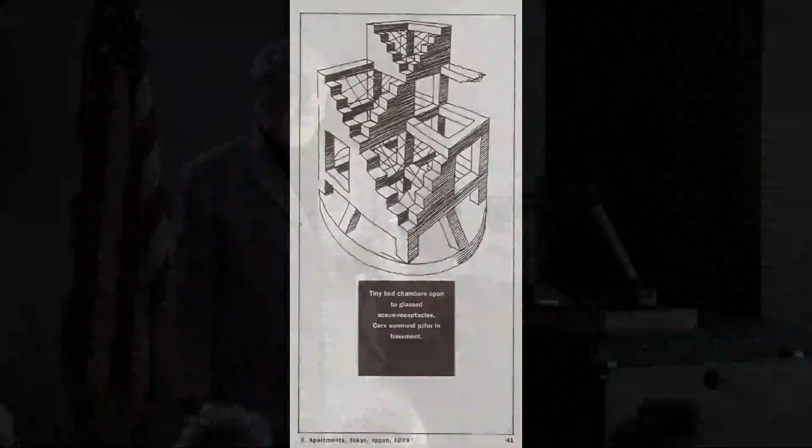And this, which is 3 apartments in Japan, in Tokyo, in one of the first drawings, belongs to this kind of imaginary beings, almost like monsters, but the geometrical aspects are explored through it.

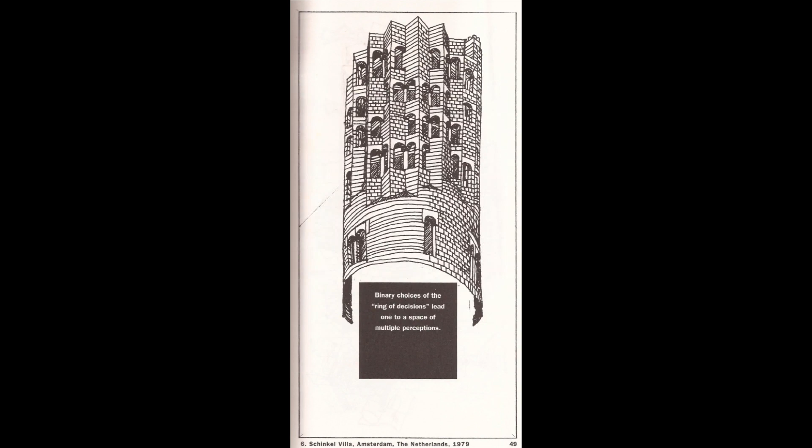This is also one of the first drawings of a villa. I just would like to show you that one has to develop this ability for what you think - as you used to say, and now I'm also prone to say - it's in my head, I just have to draw. So this transfer from your head to the drawing is very important, and you just have to be courageous and believe that you can do it, because everybody can.

It's not something which you have to be afraid of. This is a special project.

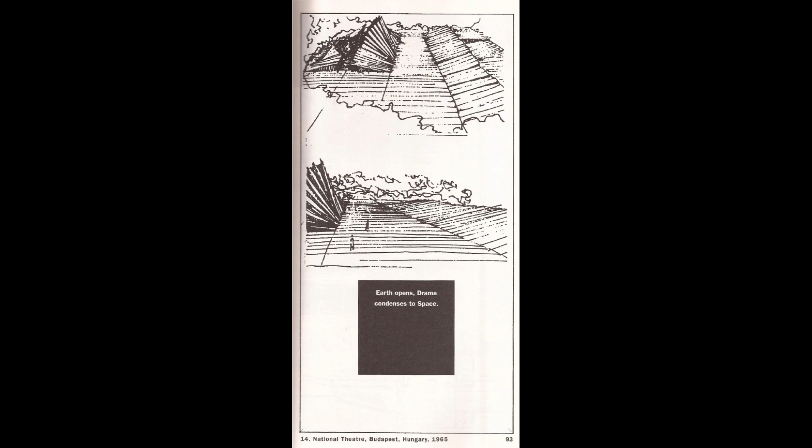This is one of the first of the 3 Hungarian theaters, national theaters, which I designed a very long time ago. Through it I became somewhat known to the grown-up architecture community, because I designed it while I was still in architecture school, as a competition entry, a national, international competition.

So it was really something which was another encouragement for you, that you dare to do it, because that's how you learn and that's how you progress.

I like these little, I'd say limping prose poems. Earth opens, drama condenses to space. Somehow it really defines a theater, at least for me.

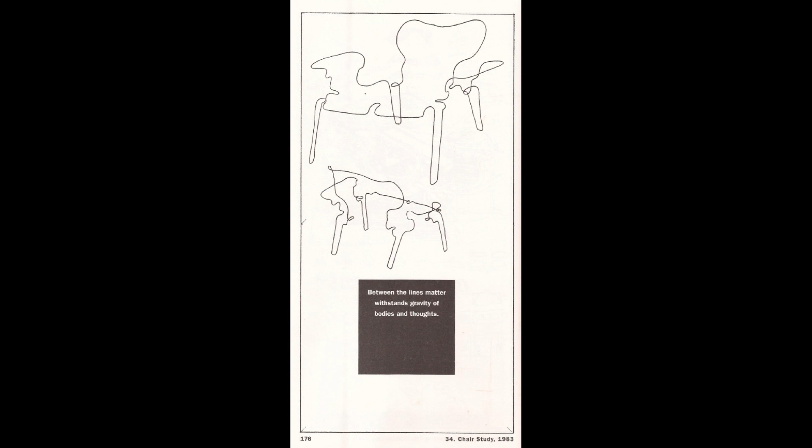Now, this is obviously a chair, or two views of a chair. And it has also, that's very funny, a definition that between the lines, matter withstands gravity of bodies and thoughts. This could even be a kind of program in architectural design, because that's what we are doing - we are drawing, and the lines represent the material.

If you think about it, I was very surprised how your mind regulates what you believe or what you see. Don't you see clearly that the chair material where that dot is, is solid, and this is the air? I sort of started to see it after I programmed my mind this way. So I think programming your mind is a very important element in design.

This is one of my favorites - it's the Peggy Guggenheim Museum in Venice. I think this is the most complicated drawing which I ever drew directly on paper.

There's too little time to explain, but I also studied the Venetian Palazzo as a building type, and all of the tripartite elements which are part of the Venetian Palazzo are here in a very complex way, in several directions. I'm sorry, but we could not get into the individual projects because we'd be here till midnight.

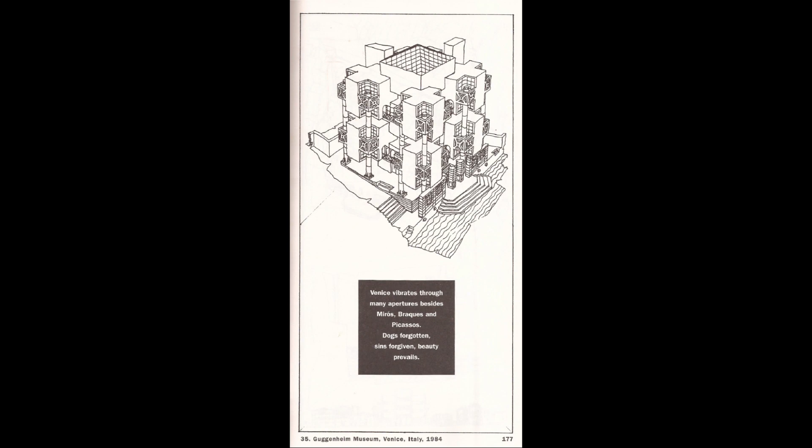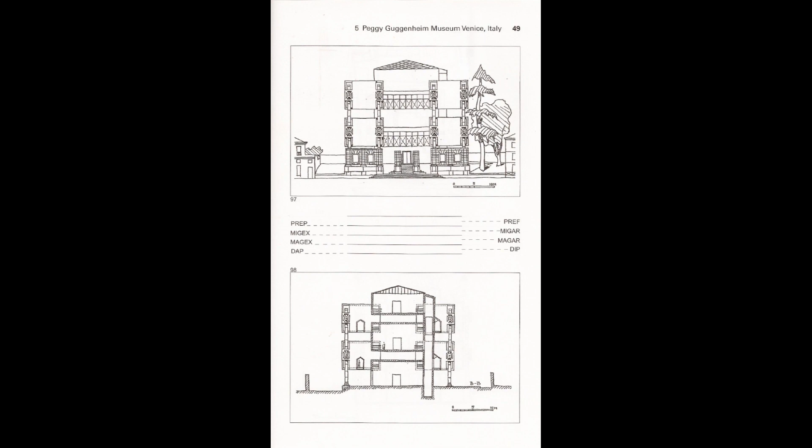This is, again, the same building, and in the middle you can see the location, the position of these abbreviated notions - data processing, data interpretation, and so on. The drawings are numbered, so when it comes to the final summary, you can just map the drawings in the appropriate place. This was another building, a house for a virtuoso, also in Venice.

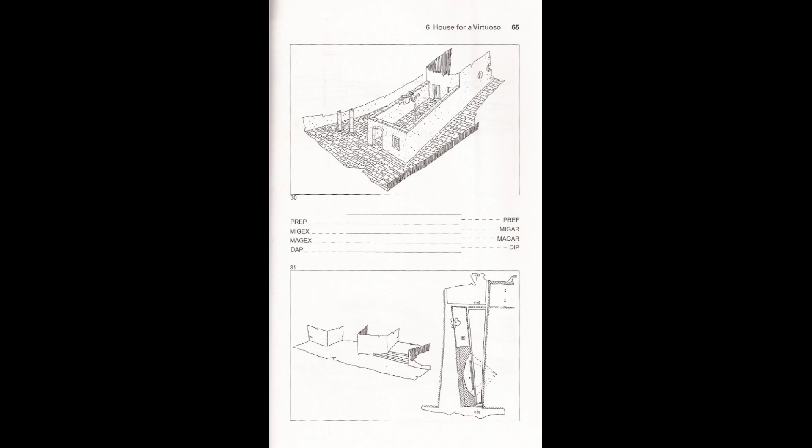And this was the third project, the so-called Venice Gate competition, which was really just a bus station with some office building, but positioning it on the Grand Canal made it a very interesting exploration. This drawing, I enlarged it, because they are somewhat in the manner of these imaginary beings - they look like more than a building only.

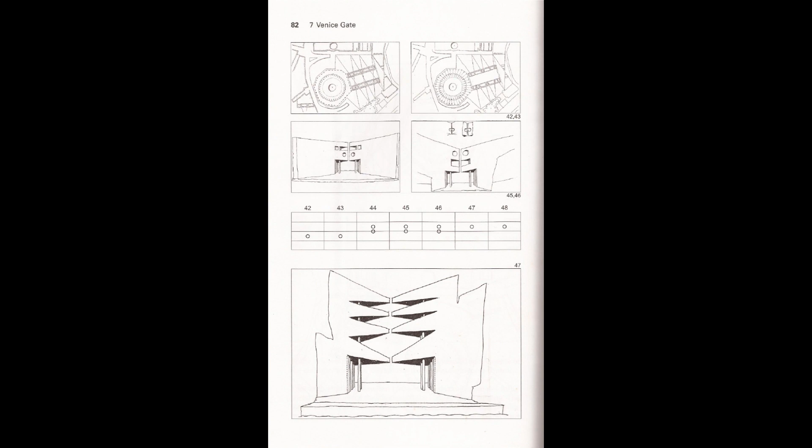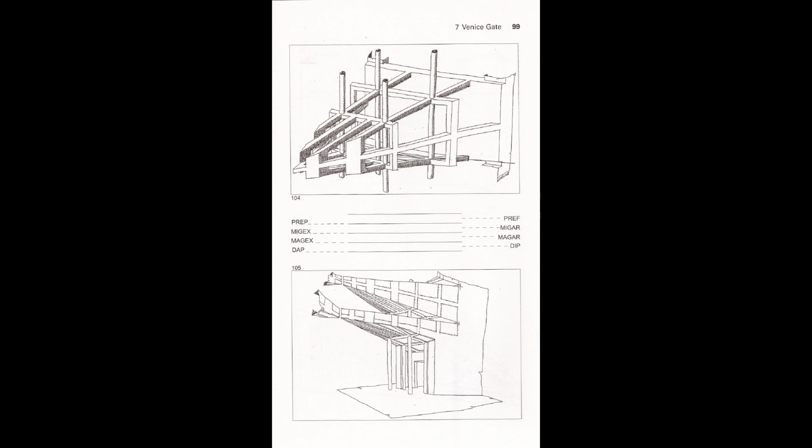With my phone call to Alvaro Siza, he gained a 2-year internship with him as a model maker. So I'm very proud that this model helped him to work with one of the great architects of our times.

Here is that so-called partitura of the design process, where, of course, the upper numbering is the drawings. As you can see, not even all the drawings are included, however the major drawings are all there - and even this short competition has 150 or so drawings.

So the numbers are not just for the sake of numbers, but when you are really questioning in the design process and not making statements, they automatically come up as the next and the next level. So you almost cannot stop.

I made an inventory, and I've lived around 20-some thousand days. I have 10,000 drawings, so every second day I produce a drawing. So that's maybe how you can gauge that it's not only the drawing you live for, but it's definitely one of the major pleasures which you get from life when you can explore and invent, in many cases, some things which haven't been.

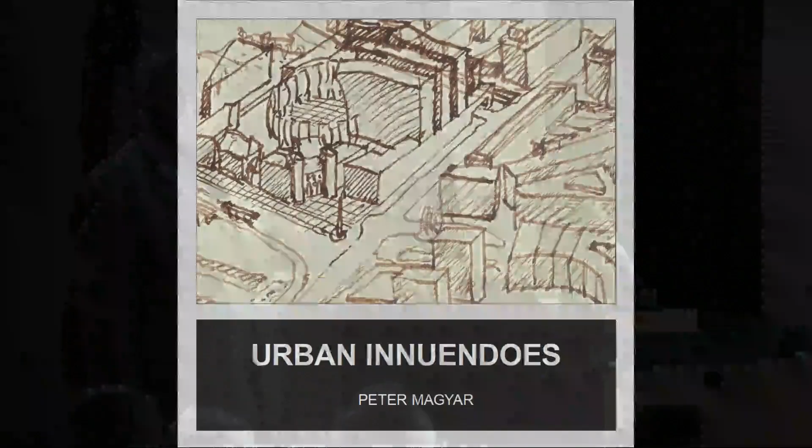This is the third project, the Urban Innuendoes, and I just blew it up because one of the 3 or 4 co-authors who had written essays in the book emphasized this: that the journal, this book, or the drawings actually, are a journal of emotion, because they show how you draw, how fast you draw, where you hesitate, and so on.

And of course, my favorite tool, as most of you know, is this - my fountain pen. However, I have some problems with it now because I'm waiting for the kind of divorce settlement, because now I started to draw on the tablets with a very blunt tool, the stylus. I'll show some drawings from that as well.

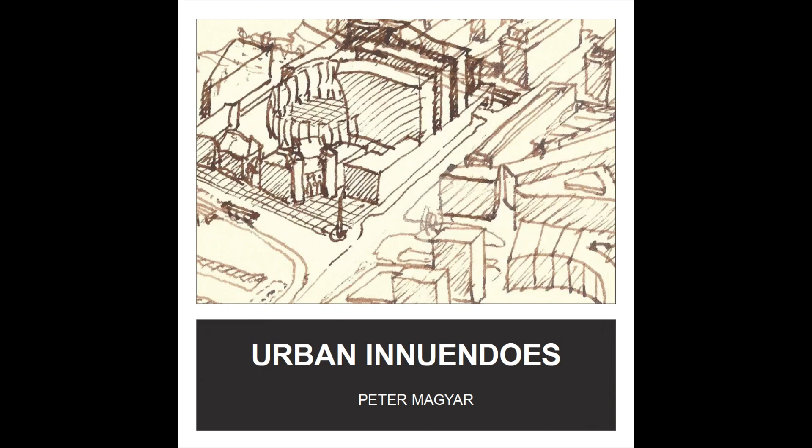Again, in this volume, only the inception of the architecture idea is recorded. It's telling you in different ways that they are unfinished projects, but still I value them because they were developed to a certain degree of readiness where most probably the additional development would have been only quantitative mostly and not qualitative.

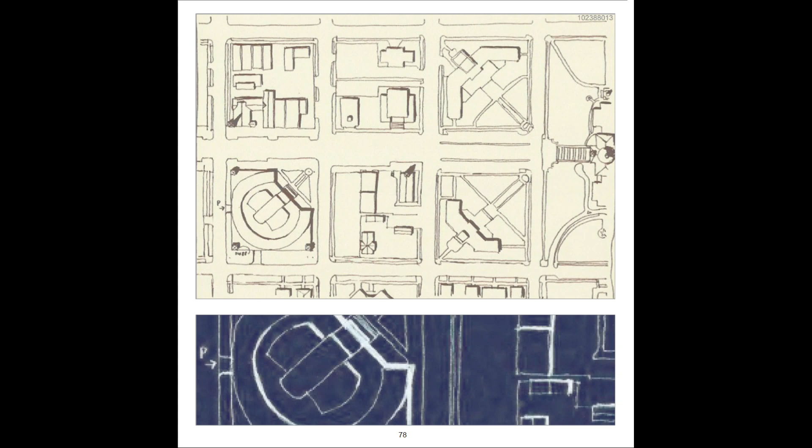This is drawn from a photograph, a city street, Dexter Avenue. On the left lower corner, you will see a building in the second half of my talk, which I designed as a design consultant and actually design principal of a firm.

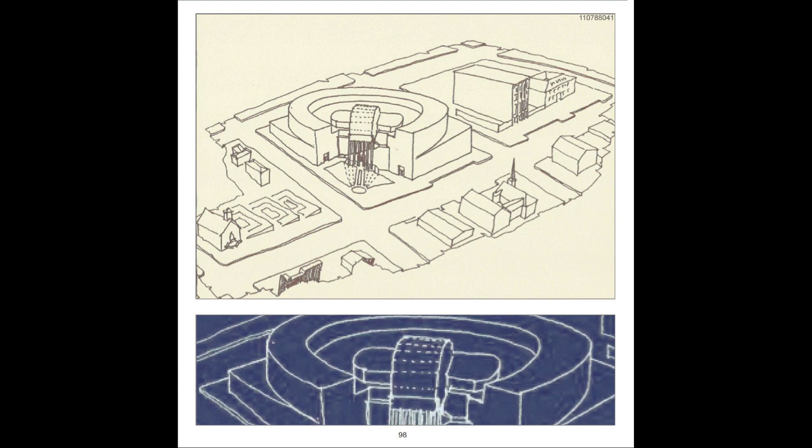Here is a closer look at this geometry. Interestingly, I used Michelangelo's geometry where the inscribed circle into a square was repeated several ways, and that generated this shape. On the left lower edge of the drawing is the chapel where Reverend Martin Luther King was a pastor in his youth. So it was a very interesting element that the judicial building looked through this church towards the Capitol building, and that was always a memento of justice.

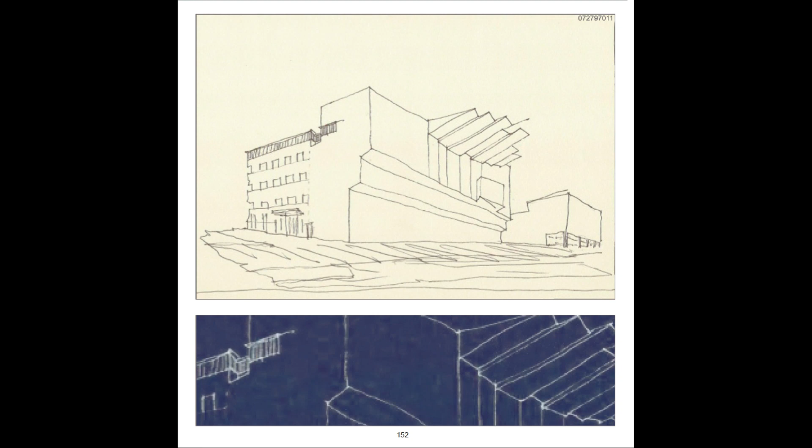Alvar Aalto's first building was a military recruiting office, and that's on the left with the punched windows. An international competition was about to add a concert hall to it. And he had also in this Jyväskylä already two other buildings. In the middle of the image approximately is the theater, and the lower L-shaped building is a police station. So this and the park, this was the urban situation into which this was one of the earlier drawings of my project.

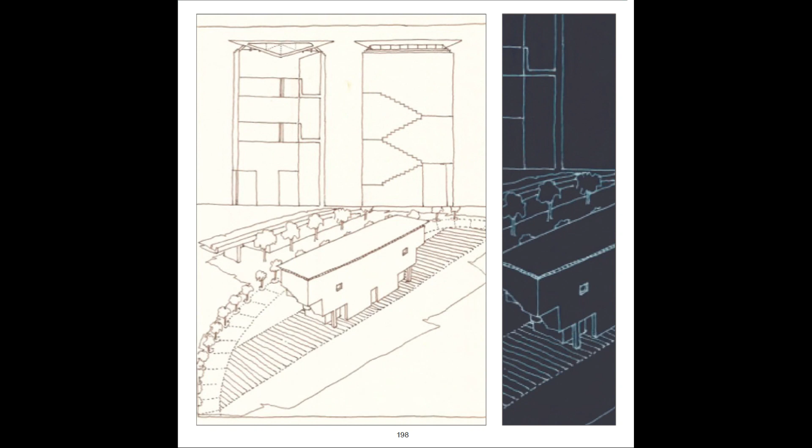This was in Fort Lauderdale, a guild house for architecture, the AIA headquarters plan design.

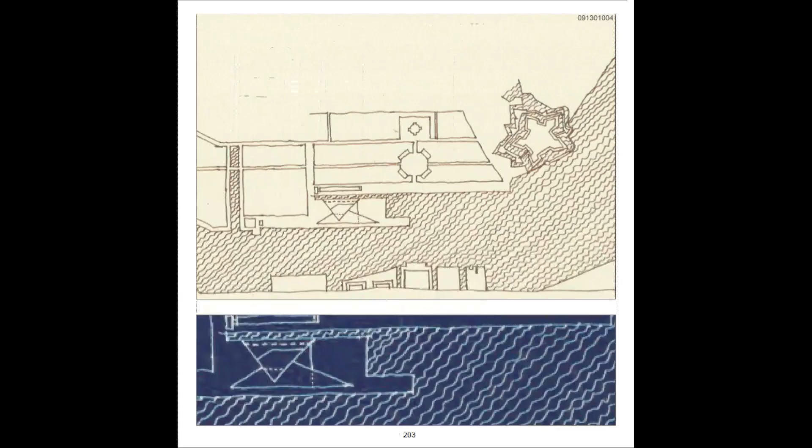This playhouse, Royal Playhouse in Copenhagen, where on the right side you have the fortress, the octagonal square contains or is surrounded by the Royal Palace, several buildings, and the two triangular intersecting shapes - that would have been the theater, or that's what I developed for it.

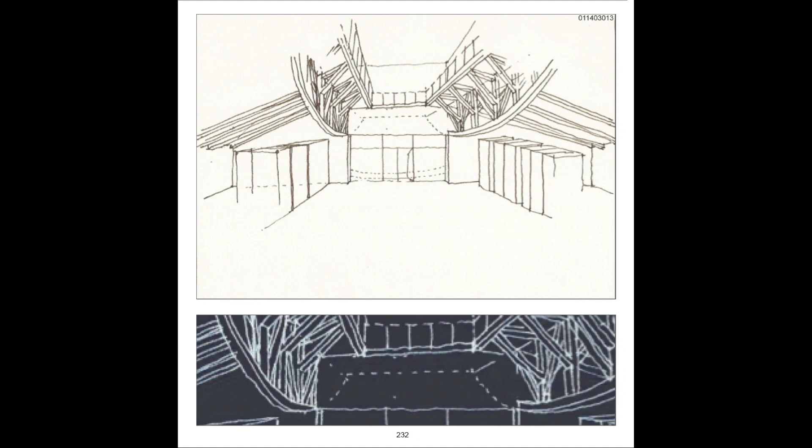This small building was a house for a poet, a student competition. I very often did design the student competition also myself, just to test myself and maybe learn how difficult the projects we are assigning to students are. This is the inside of it. This would have been an interesting project if I could finish it.

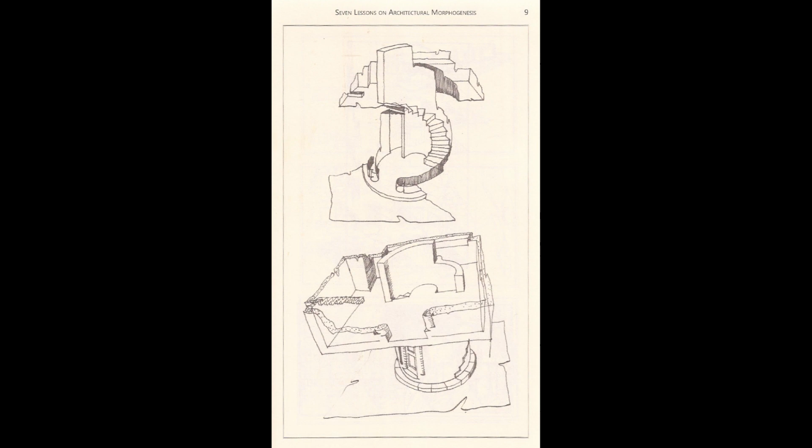Here there are 7 large projects which I all submitted with partners, which I of course give full credit to them. This is the Paris Opera House, some of the preliminary sketches.

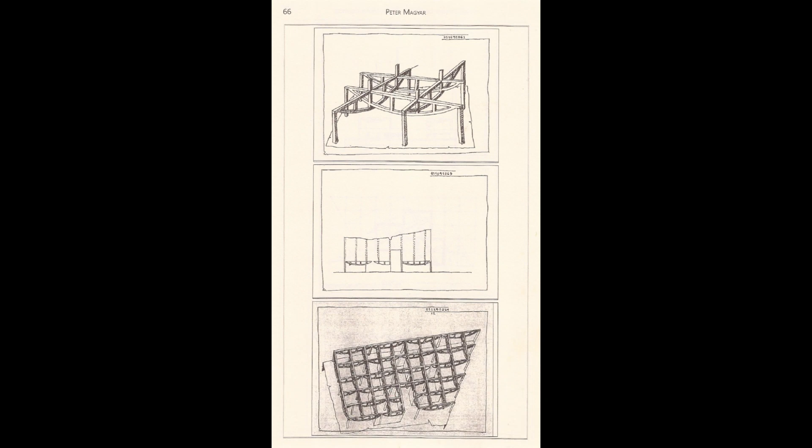This is a public safety building in Pittsburgh, where the structure was analyzed this way. It had 2 different grids, one for the parking for 3,000 cars and one for the office building above it, and these were also some of the development drawings of the design.

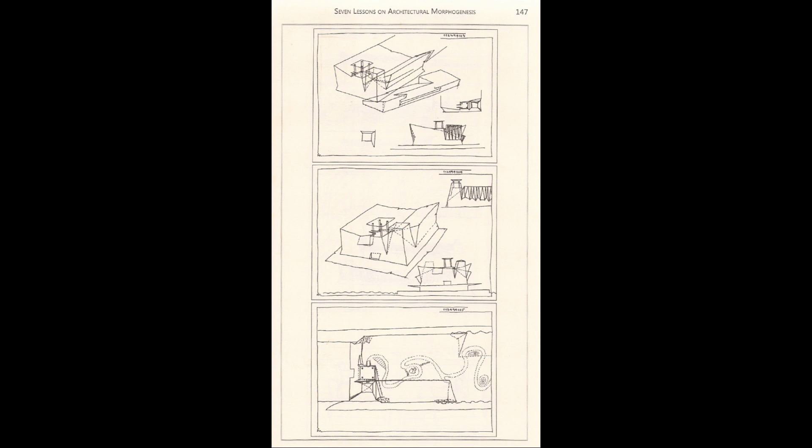This is the second National Theater, which was different from all the others in that it had to be added to an existing monastery, and the public part of the theater were to be placed into this existing building.

The section would reveal how it worked, that some of the elements for the public services are in the old building. Its courtyard is covered with a roof. It was different when I finished, but the idea was approximately this.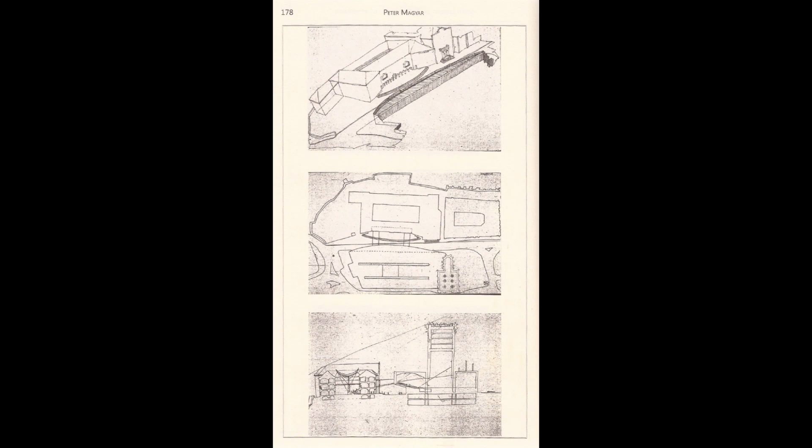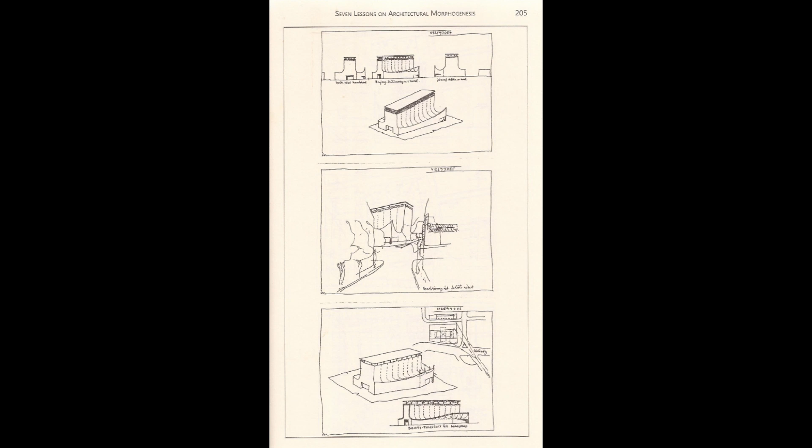Here are some drawings of the third theater, which I already mentioned at the cover. This was one of the computer drawings of the entrance of the final version, and this shows the incredibly complex urban situation, where there's a park in the large square behind the building, but in front of them very strong bus and other traffic actually disturb the silence of the theater, which is obviously a requirement.

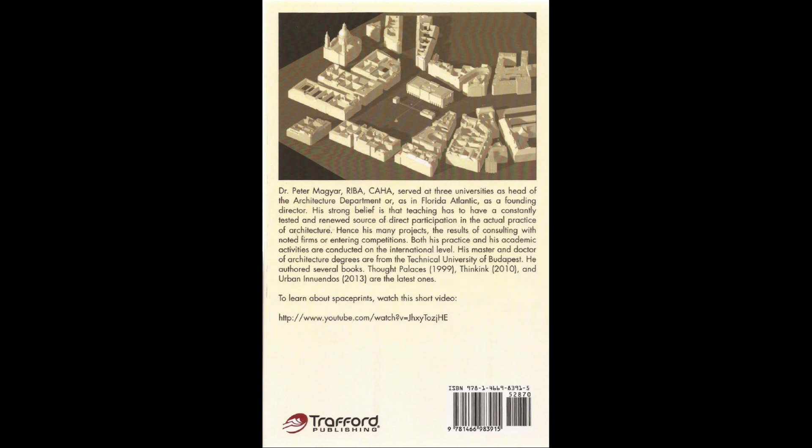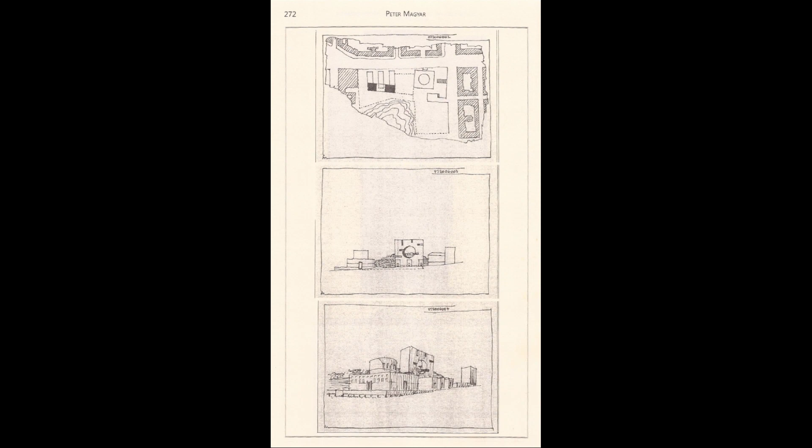This was a quite recent project, the addition to the Stockholm Library of Gunnar Asplund. This was almost a caricature, one of the first drawings, I think, and it ended differently, but it was a very interesting gift from my life, when all these very difficult projects let you test your abilities and what it gives you in your own development.

These are parts of essays which different people, professors and experts of architectural drawings, were writing. And of course, the German Architecture Museum is in Frankfurt, not in Stuttgart. So sorry, I discovered it just lately.

From here on, I am showing you works which were really testing these nice and good sounding ideas in books and academia. I had the chance, actually it was interesting, in Alabama, where you would least expect these kind of work opportunities exist, to be consultant on two occasions, and this was the first, an office building.

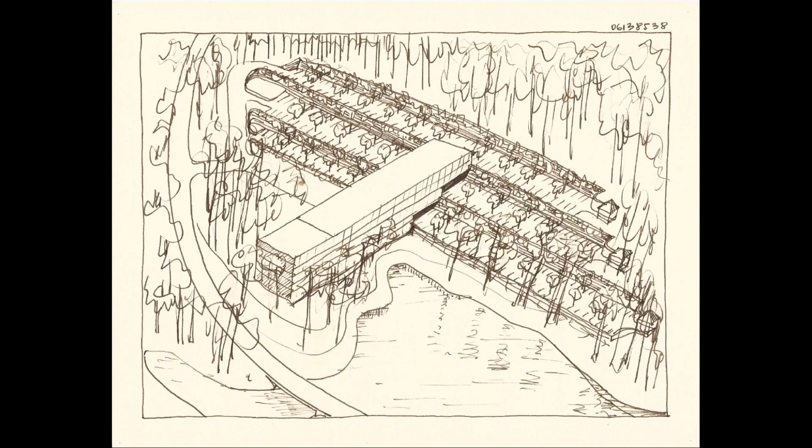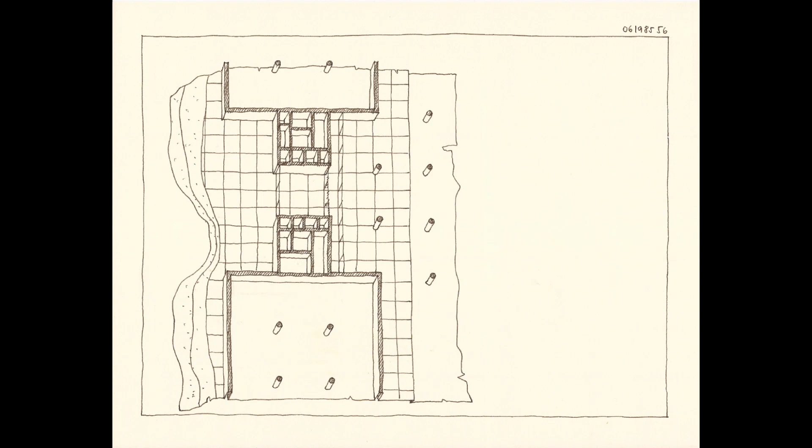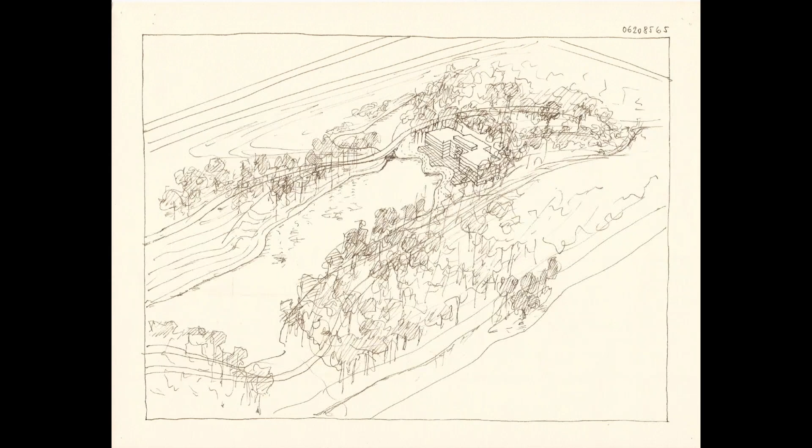These are part of my seminar project for my students, to draw floor plans like this. So I did this, not just as the students. This was one of the final arrangements of the parking and the building, and this was how it related to nature, and in what way the parking became also a wooded part, and the building sort of crowned the end of the lake.

I was thinking of the small people. The big shots obviously had offices in front of the office building looking out to the lake. But what happens with the people who are in a lower position? So I thought that by placing the staircases into the corners of the front, on one hand, this means a healthy life, use the stairs when you go from one place to the other. But on the other hand, it also gave them opportunity to connect to this incredibly beautiful side of the lake.

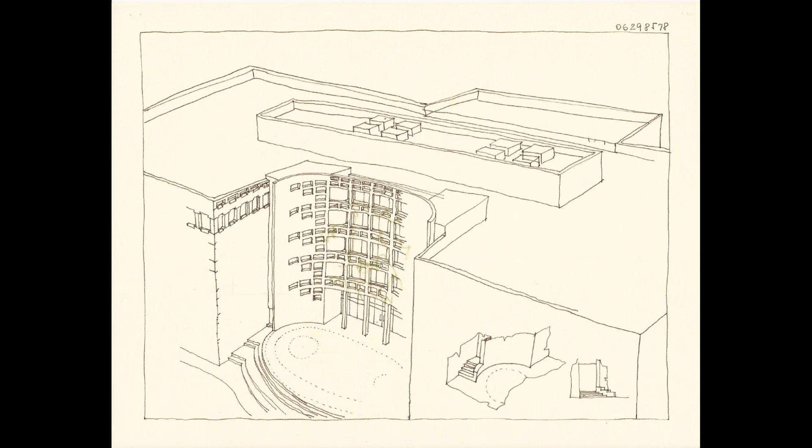So that happened, but unfortunately, the value engineering stepped in, and as you can see, the intensity of these ribbon windows are in no way connected to the middle part of the building, but it's still a pleasant surrounding.

I also participated in the urban design and the master planning of the two other buildings. The point was again here that you have a very strong resistance from any contractor not to start that way, that they flatten the area and then they put the parking there. So to do the more difficult thing, to follow the terrain with the parking, that resolved many of these questions.

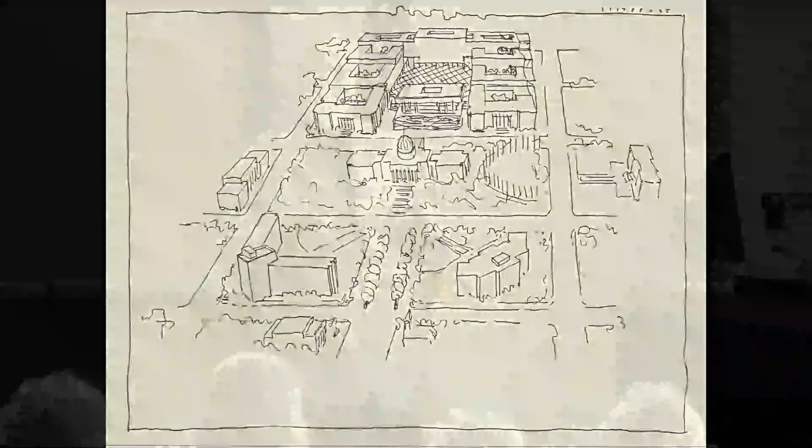Mr. Wilfried Wang, the person who was the former director of the German Architecture Museum, in his essay also wrote that Peter draws like a clairvoyant. It was a very flattering statement, but I mention it here because I very strongly believe that a very large part of the design, of the drawing, is somewhat in the psychic domain, something to call up your unconscious, subconscious. The book which was about the designing of this Alabama State Office Building was titled Construction Meditative. So that's what I really feel, that when one draws, somehow another reality comes in.

This was one of the drawings where I made the question to the client, and I have to stop here a little bit, because the client in this case was Alabama State. Alabama State is a notion, but not a person, or not 10 persons, or not 30 persons. So it was a very undefined client, to whom these drawings, every second week, I showed the progress.

And then asked the questions which I already asked through my drawings, that would you like to occupy the whole available site and, for example, place this building, the Supreme Court, also here, and then all the branches of the government could be present. They said no, because the only available site was that area, so I had to design for that only.

My luck was somebody else's problem. They made a proposal - two architecture firms united for this large project - and submitted it to the Historic Alabama Capitol Building Committee, and the project was turned down. They were told that they had to employ somebody versed in larger scale urban design building, and I was lucky to get this commission.

With this commission, I had almost complete free hand to design the building from urban scale to door handle scale. I mentioned to students, when showing details of these buildings, that I did not sign construction drawings, and it went wrong sometimes - those things happen all the time.

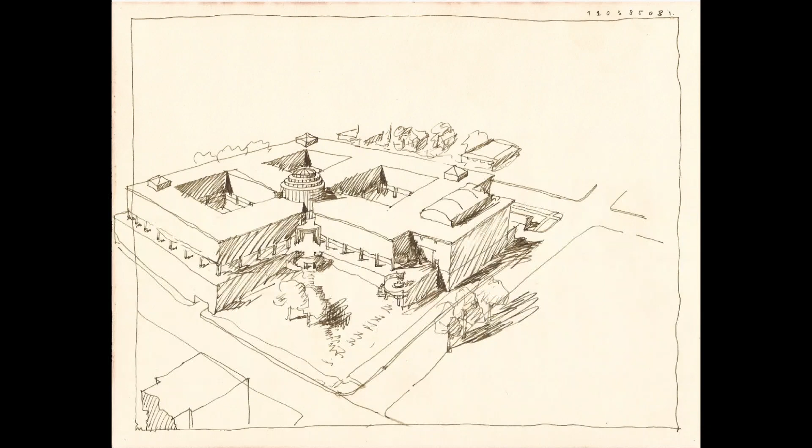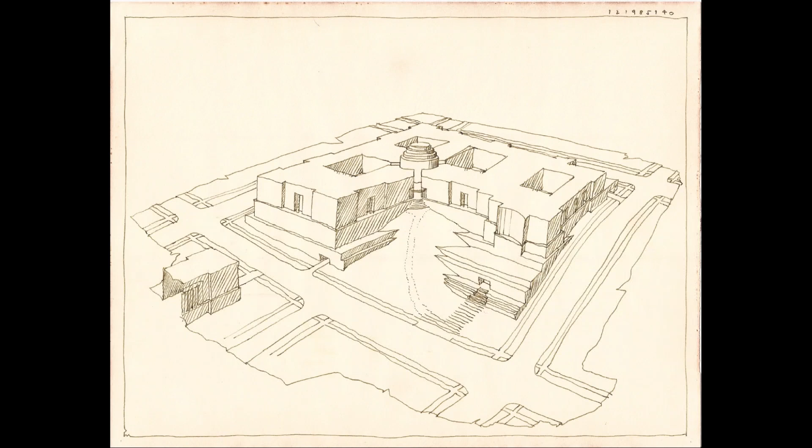This was one of the massing explorations, about connecting the building to the front, facing the back of the Capitol building, and resolving the 50 feet elevation difference between the upper left and lower right corner of the site - which, as problems often are, gave us the opportunity to place parking under the building. This was my favorite drawing.

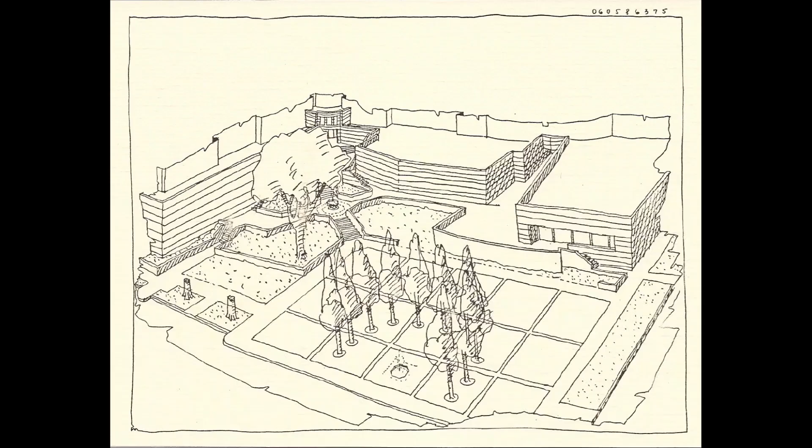Unfortunately it was not there, so I had to explore further and do different things. This is very close to the final stage, with the plaza in front and the diagonal entrance serving as the symbolic entrance to the building.

The rotunda distributed traffic between the different parts of the building. It is 750,000 square feet, so that's 3/4 of the Pentagon - a very large building.

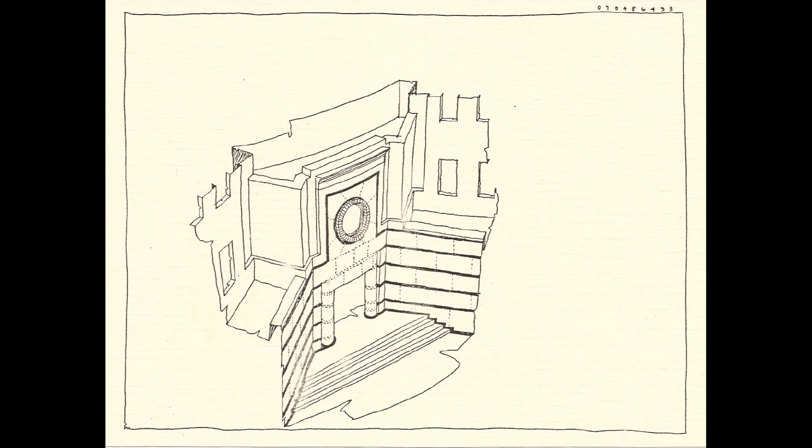This drawing shows the kind of deception with which I tried to express that this is the main entrance, leading into a significant space - but it's actually two levels. The round oculus leads to a break room, and the lower levels are just the usual 10 to 14 feet floor-to-floor height.

It was a green building nonetheless, because it had to have operable windows, natural light, and so on. That was something I was very proud that we achieved.

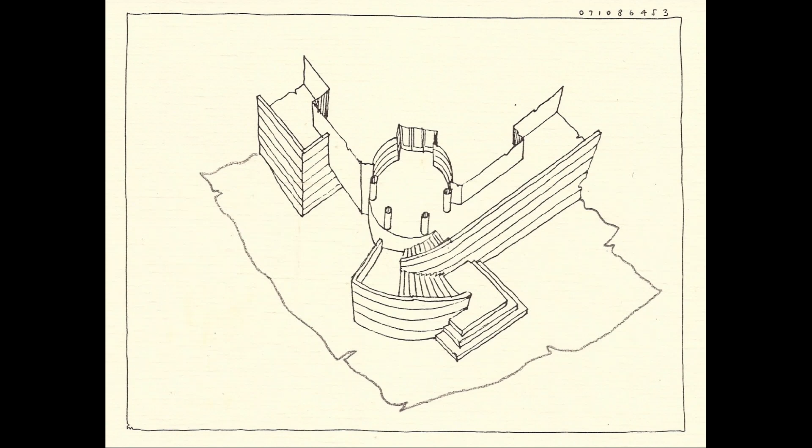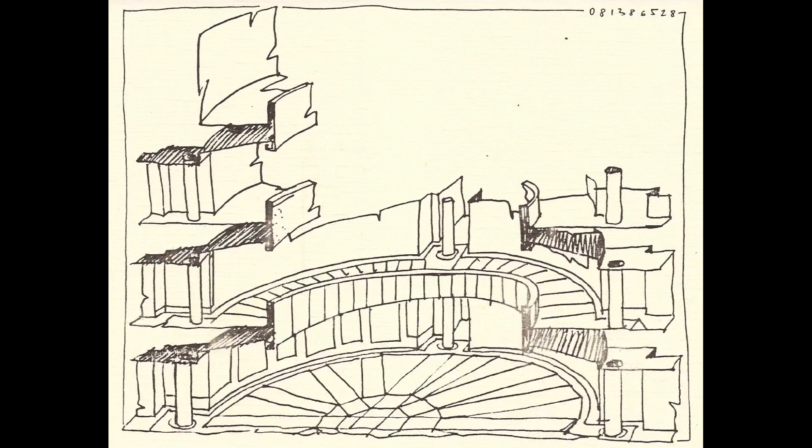My hand drawings were put to the office personnel, and they worked them up - we followed both the model and the construction drawings, first the schematic designs and so on. But every element from pavement to materials had to be decided.

This drawing looks like it was marinated in red wine, but it's just a problem we had in our garage in Florida, where the stored drawings suffered some water damage.

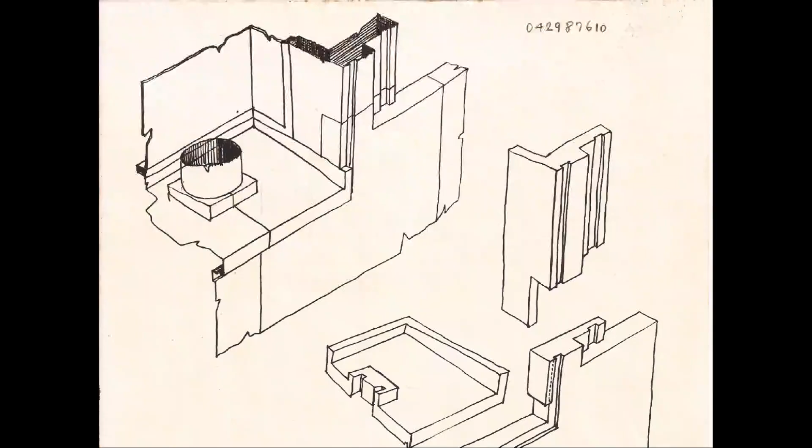Every panel had to be designed individually - the handrail of the staircase, and so on. I did more than 800 drawings, so it was a very interesting learning process to arrive at a building of this size, where you have to have in your hand every particular detail.

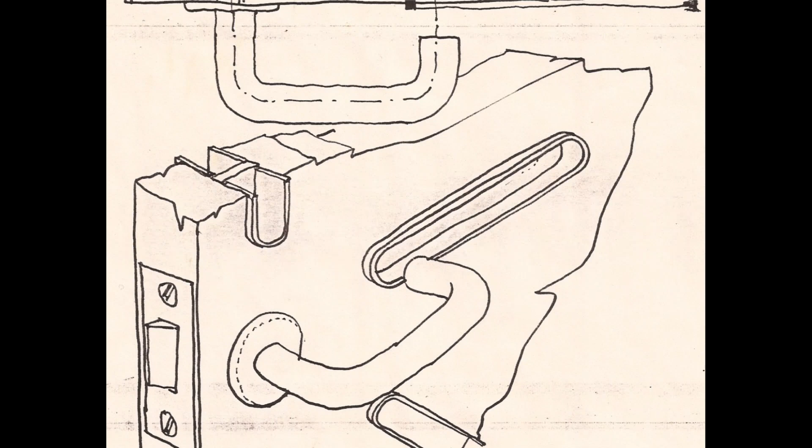Very able persons helped - many of my former students, I have to say, in the firm. So it was an enjoyable work of approximately two years.

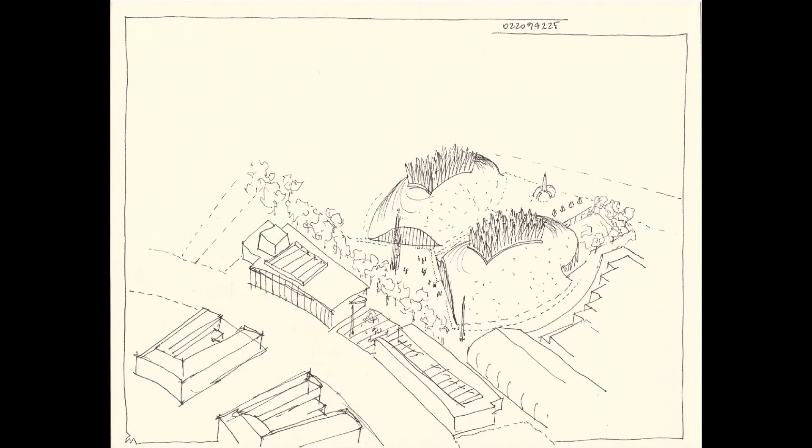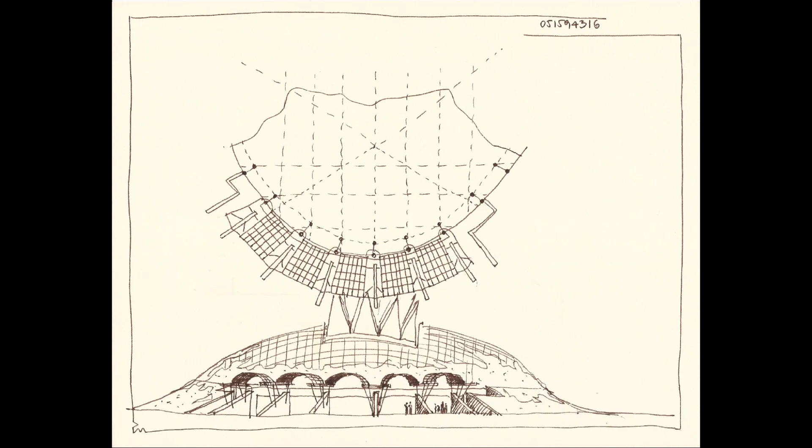They took on the production, the actual construction drawings, and construction administration. Mostly I did the drawings from small details to large ones. I just randomly selected some details which maybe you can see in the following photographs.

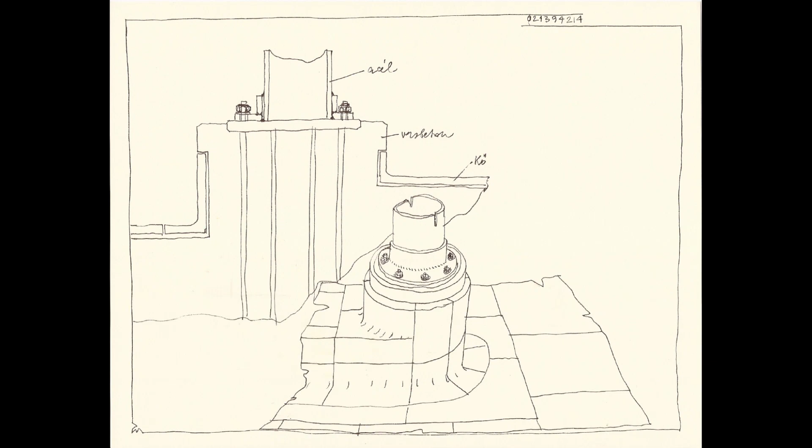Again, details of structure and solutions in details - especially when I discovered that with all their mathematical knowledge and PhDs in mathematics and structure, structural engineers have not much sense of space. So many of the structures I had to draw up myself, and they were built. We later went to Budapest with students from here, because we had a project there two years ago.

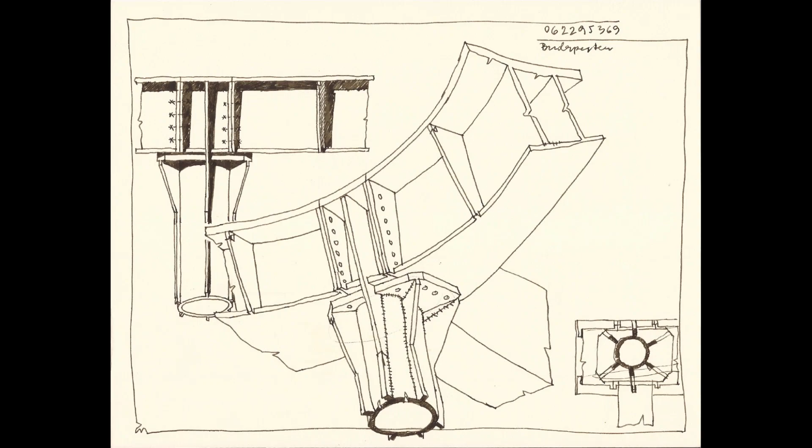The students told me that, oh, they look like your drawings. And indeed, because they did it as it was drawn and, of course, made to construction documents by my friends and very talented people in his office.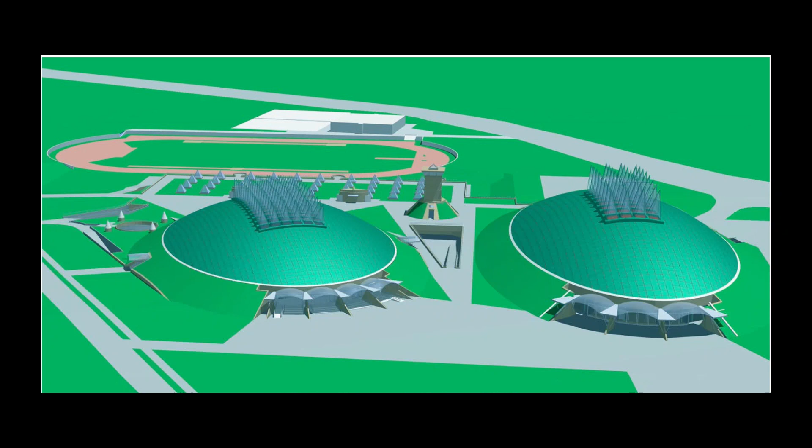This is a latest computer rendering of the as yet unfinished ensemble. This part was not built yet.

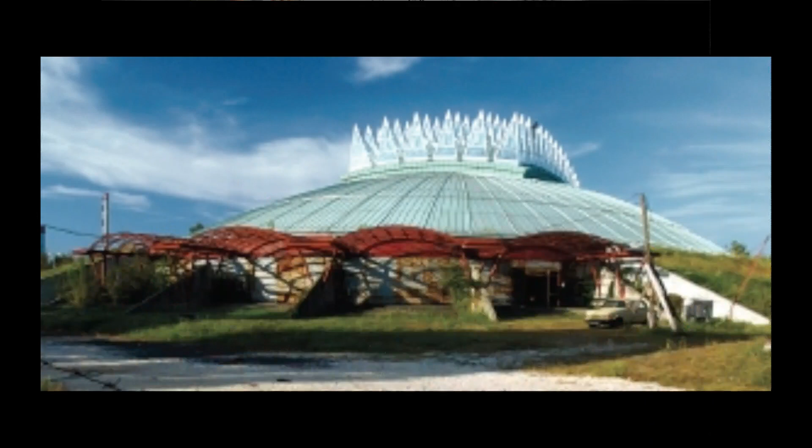This is how it is. Obviously, sorry, let me show a better image. The surrounding buildings here and all around are the usual geometrical so-called point houses, which meant sort of 16-story high residential buildings. And the idea was here that this becomes part of the terrain, so it had this arrangement that under the serving areas of the structure was placed.

The interesting personal element is that in this building, in this place, this is east, I have seen many, many times the sun coming up, especially in my last years of studies. That was the architectural building, the central architectural building.

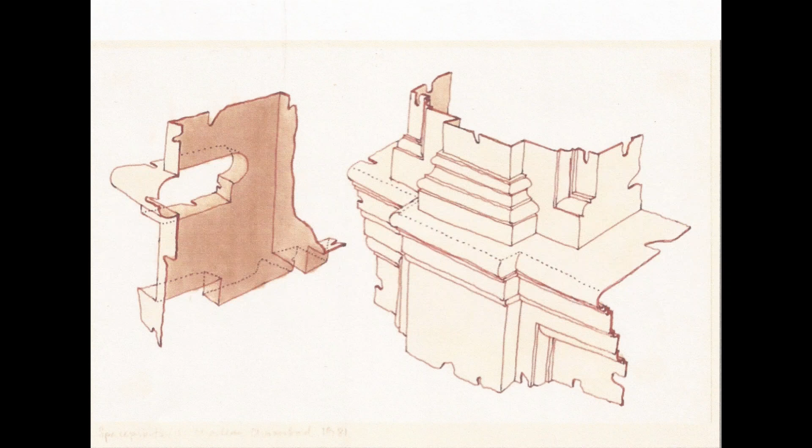This is in Rome, maybe the one building which I didn't draw as imagination or imagined, but then these parts I did already, and these show how these surface diagrams actually describe the non-space and the space here and here, and especially here.

You can imagine that this is the edge of infinity. So if you can put architecture in your mind into that context, then I wouldn't encourage you to think you are God, but very close to it, you know, because it definitely, who can do this, to form or shape the infinite?

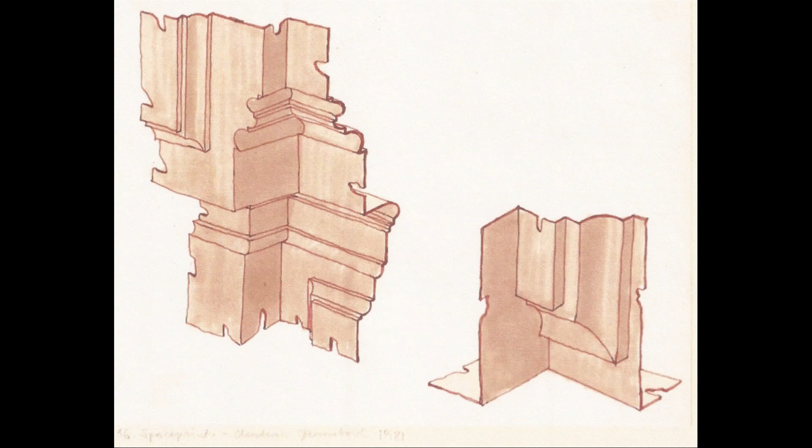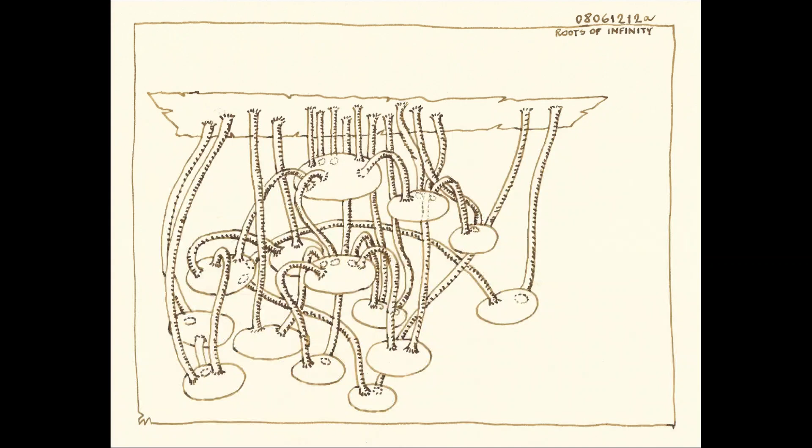Believe it or not, this is our home on Newbury Street, and this is the so-called simplified general space print, which is a kind of structural description of a house, in this case, our house.

Students honored me by inviting me to do an article in Oz 36th issue. So if you will make an effort to read it, you will learn more about this aspect.

This is the Villa Rotonda of Palladio. I don't think when you were here, when you were there, Matt, you read it that way, but it really is the space, and this is how the spaces are connected to the outside and to each other.

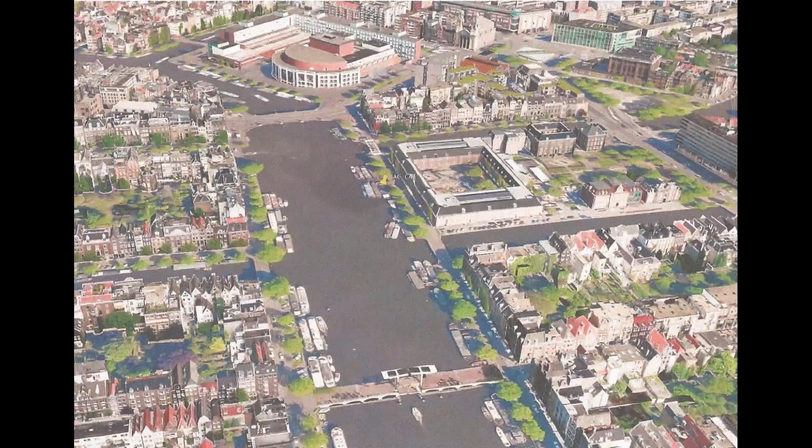And interestingly enough, on the same area here, that was the site for a city hall for Amsterdam. And Mr. Holzbauer, an Austrian architect, convinced the city fathers to do not only a city hall, which is that part,

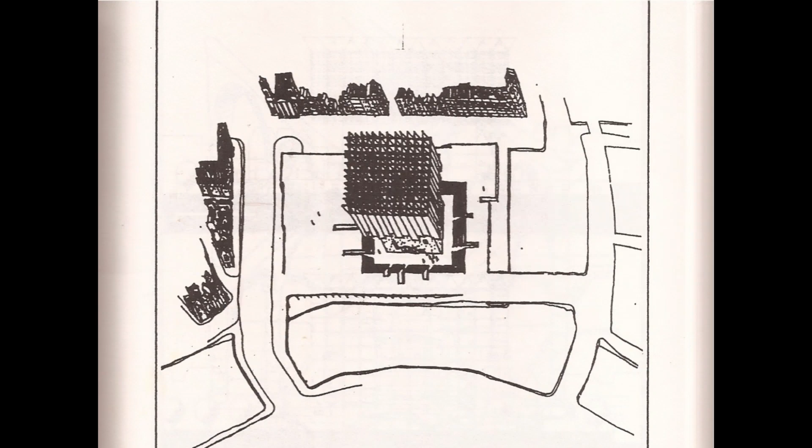but an opera house. You can imagine 10 years it was in the making, and they are still not finished the underground connection to it. But my project was much, much earlier, and obviously a non-winning project to the same site, but this is very interesting to see again the same site as a project.

This was a project for skyscrapers. Evolo, an Italian magazine, every year has a competition for skyscrapers, which sometimes appear underground, which sometimes appear under the sea.

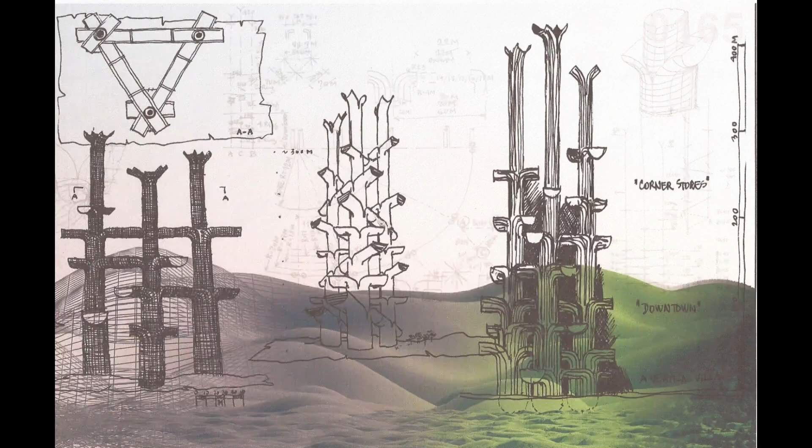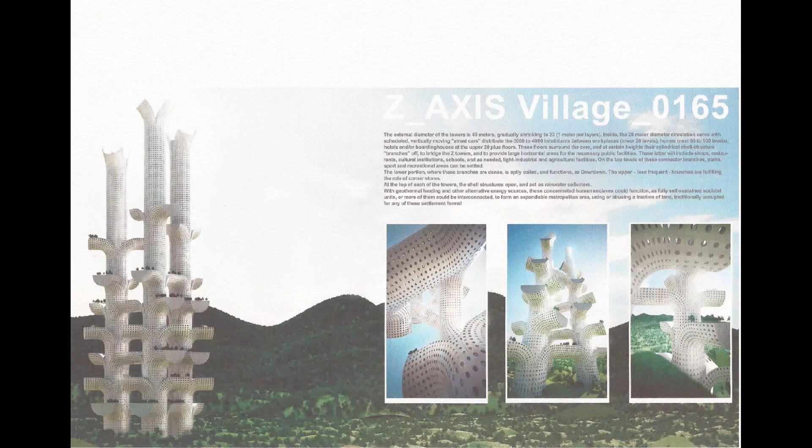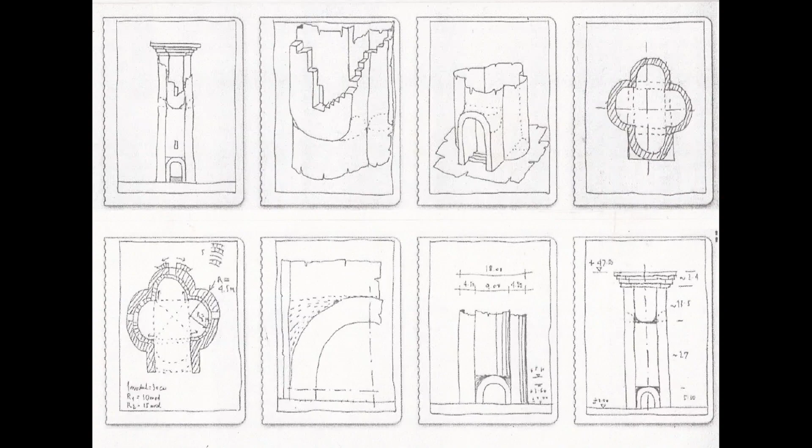And this last project is a cooperation with Tyler Hyatt, my friend here in the first row. I did these drawings on that already mentioned penultimate program, electronic way of drawing, and he made from those ugly lines this beautiful sculpture. This was a house for Michelangelo,

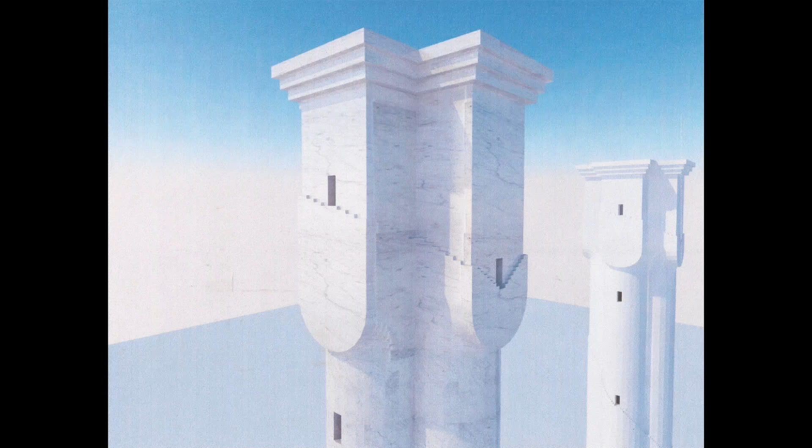and this is the image with which I finished my presentation. One sentence I would like, if you remember, that you have to learn the craft of design in order to learn and do the design of the craft. Thank you very much.

Thank you, Bruce. Any questions? If I can, I'll answer them.

No. Okay. Everybody is hungry, so thank you very much for your attention.